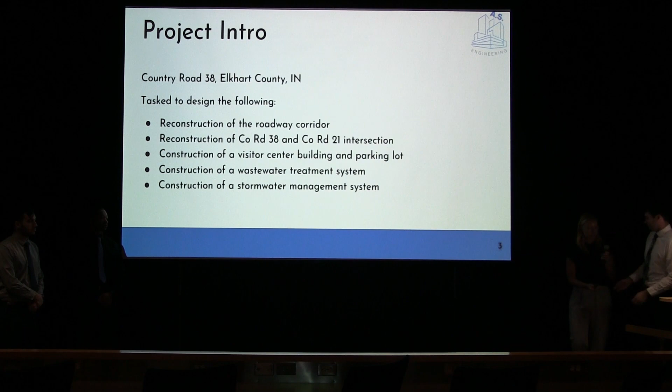Thank you, Henry. As Henry stated, my name is Carly Sheen. I'm the transportation engineer for 4S Engineering, and I'll be going over the transportation portion of this project.

For the scope of the project, one of our main goals is to improve safety for all road users, including pedestrians, cyclists, and drivers, through the implementation of the proper infrastructure for the resources that we have. Another goal is to upgrade the level of service and stimulate economic development through the movement of goods and workers through this corridor.

In this visual, you can see that some of my main goals are to analyze and design a new intersection for County Road 38 and County Road 21, design a new parking lot for the visitor center that will be constructed,

realign County Road 38 with a 3-lane section, and include a multi-use path along the length of County Road 38.

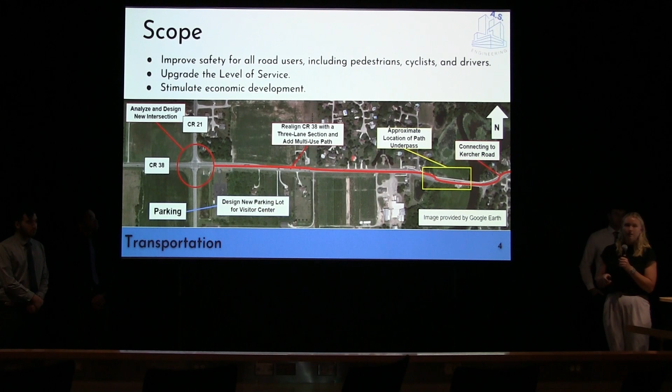We also will have a path underpass located on the east side of the project that will go underneath County Road 38 and tie into an existing path on the north side of the project.

For gathering data, since this project is in Elkhart County, a lot of the data was provided by Elkhart County since we're under their jurisdiction. So the traffic counts and the crash data were both provided by them, and we're designing to the design speed of 45 miles per hour per the scope provided.

For determining the design criteria, I designed them to Elkhart County street standards, a policy on geometric design of highways and streets, also known as the AASHTO Green Book. I designed to the Indiana Design Manual 53-2, and since this project is funded by Elkhart County, we're designing to

their standards, which, unless otherwise stated, is the AASHTO Green Book. So most of the stuff that I was grabbing from was the AASHTO Green Book.

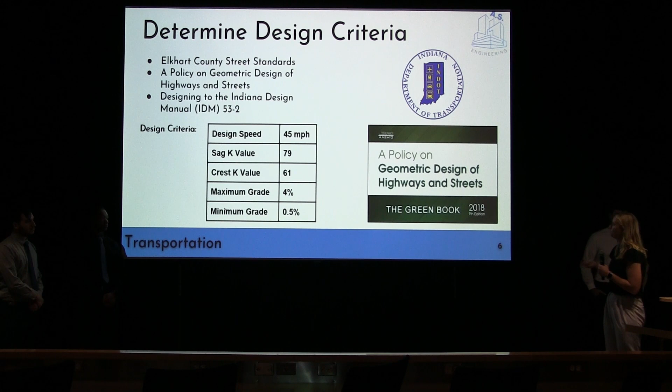For analyzing the data, I conducted a traffic impact study due to the new visitor center that will be constructed, and I used the ITE trip generation manual to grab those numbers using land use code 495.

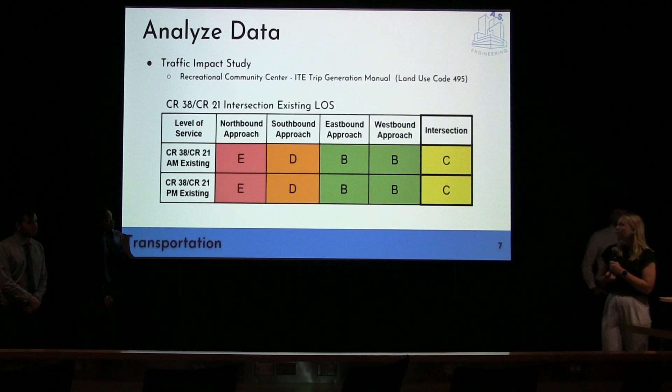Because of that, I was also able to use the traffic impact study to see what the future volumes will be on the roadway and figure out which alternative will be best, thinking about the visitor center that will be there.

Per the traffic counts that Elkhart County provided, I was also able to evaluate the existing level of service on the intersection, and the intersection as a whole has a level of service of C, which is good to see that it needs to be redesigned to upgrade that level of service.

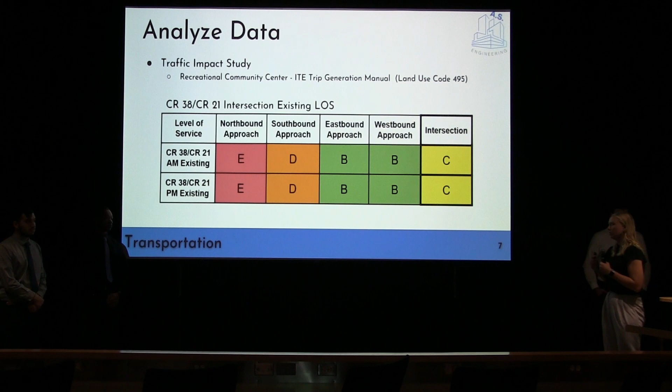Along with analyzing the data, I also designed a parking lot. Using the ITE trip generation manual again, and using the fit curve equation, it was recommended 101 stalls, but I rounded up to 122 to be conservative, and it fit better with the allotted area.

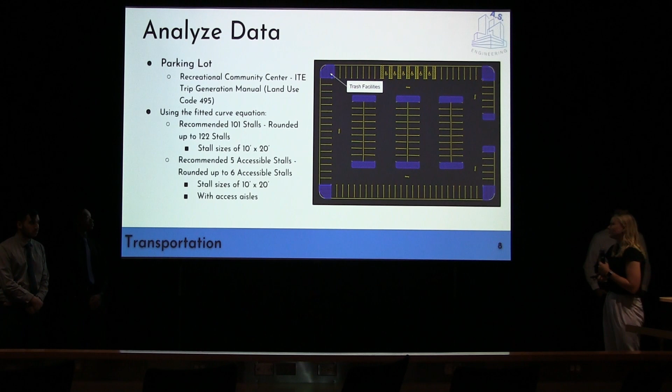I opted for stall sizes of 10 feet by 20 feet for bigger parking facilities, and for ADA requirements, it was recommended 5 stalls, and I rounded up to 6 accessible stalls, just for an even number. I also went with the same stall sizes, and they all have access aisles.

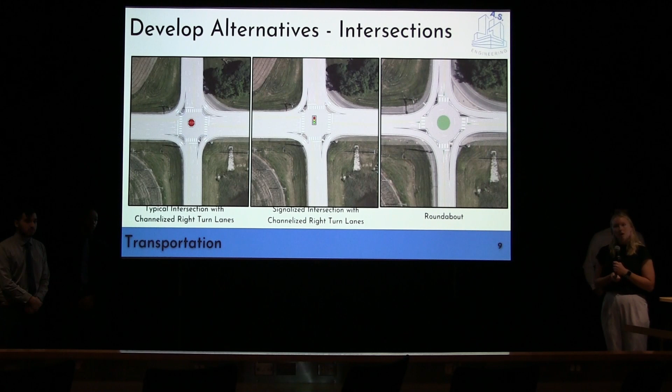For my alternatives, I opted for 3 different intersection alternatives. The first one being a typical intersection with channelized right turn lanes, the second one being a signalized intersection with channelized right turn lanes, and the third being a roundabout with 2 circulatory lanes.

For my next steps, I have to evaluate and select my best alternative by comparing all my alternatives in Vistro and deciding which one is best given my options. I also need to finish more detailed design work and model my chosen intersection in Vissim to have a 3D view for my next presentation, and I need to conduct a cost analysis.

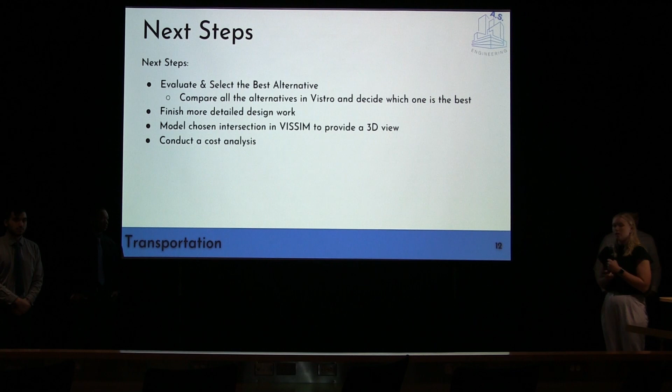I'll now be passing it on to our structural engineer, Darius Lane.

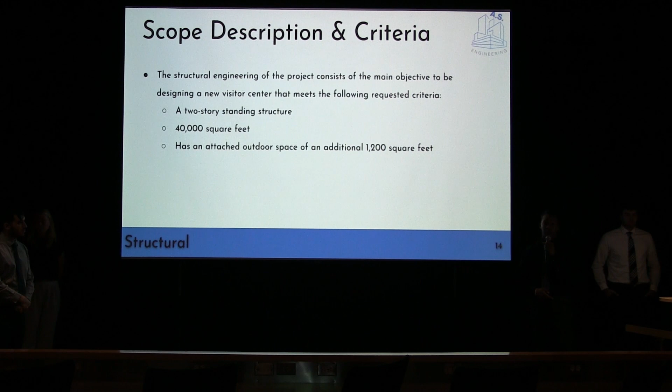I had to develop the scope and design criteria for the visitor center, develop 3 alternatives, analyze and evaluate the alternatives, and then select the best one. The scope is to build a 40,000 square foot visitor center that is 2 stories with an additional 1,200 square feet that is covered and attached to the building.

My overall progress: I have developed 3 design building alternatives - one is a steel hexagon alternative, and 2 are L-shaped, one being concrete, and the other a combination of masonry and timber. I have a rough floor plan for the design alternatives, but a detailed one is out of scope - I just needed an overall rough plan for column spacings and overall occupancy flows.

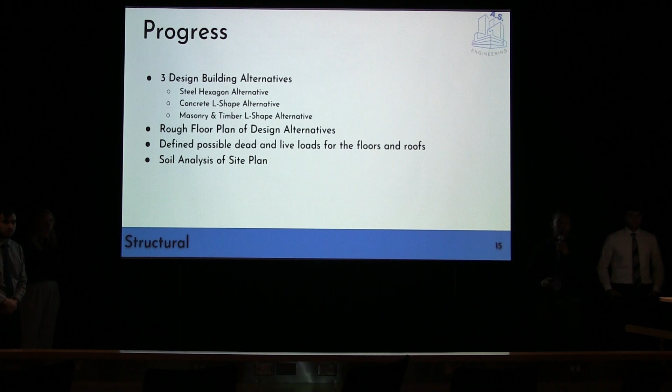I have defined possible dead loads and live loads, completed for the roof and the floor, and I have a soil analysis of the site plan.

For the first alternative, it's a steel hexagon shape, a basic steel structure with a lot of energy efficiency and flexible use, with less heat loss, which is good especially for this area as it has harsh winters. I predicted a pitched roof but haven't gotten into the details yet. These are the occupancy loads and floors I'm looking to use.

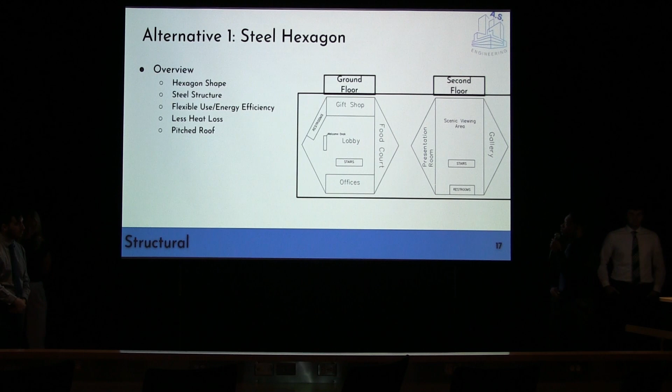Getting to my L shape for both the concrete and masonry timber combination: for the concrete overview, these are just basic physical properties I've been looking at, but nothing based on loads or column spacing yet. The concrete is a little more fire resistant, with high strength, durability, and low maintenance over time, so that's good to look at.

For the masonry and timber combination overview, it is more resistant against rotting over time, and it's fast construction and schedule-friendly, so based on our time frame, if we need to speed things up it'd be nice to use this combination. It also has increased functionality and overall energy efficiency.

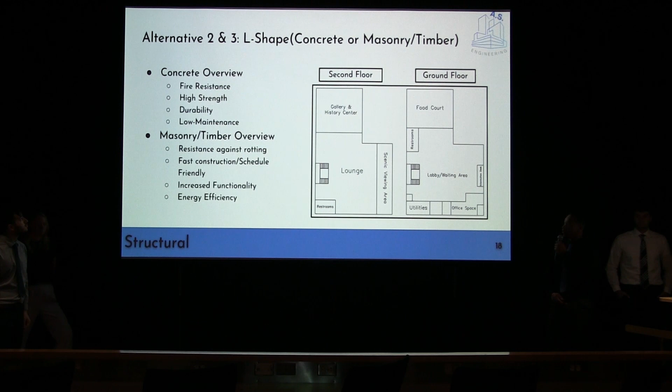Getting into my next steps, I would choose the best alternative based on cost efficiency, strength, durability, and overall functionality of the buildings. I would have to come up with a cost estimate for all of them and get into more details of the masonry and timber design elements to see if that's the route I want to continue or eliminate the alternative overall.

I will determine the column spacings, depending on if I need to change the occupancy loads I've already determined or stick with them, and then come up with an overall site layout construction, which would take place later, either by the end of the semester or the beginning of the next one.

And I'll now pass it on to our environmental engineer.

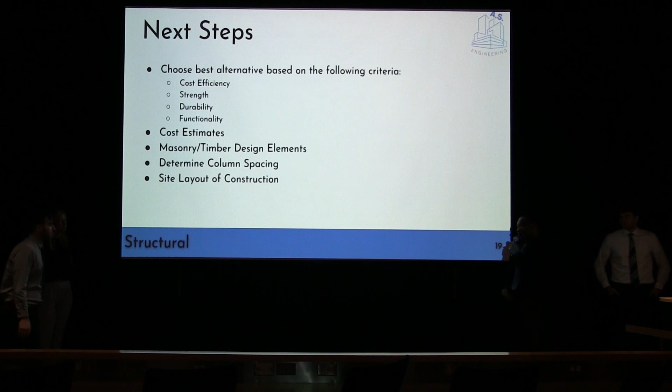Thank you, Darius. I am Jessica Messina, the environmental engineer for 4S Engineering.

My scope for this semester was to make a wastewater treatment plant that accommodates future work, future use, as well as expansion. Within this treatment plant, there must be primary, secondary, as well as tertiary treatment and disinfection. This treatment system must have a disposal outfall, as well as 1 million gallons per day average daily flow rate. With this, the system must use latest treatment technologies, as well as comply with all local, state, and federal regulations.

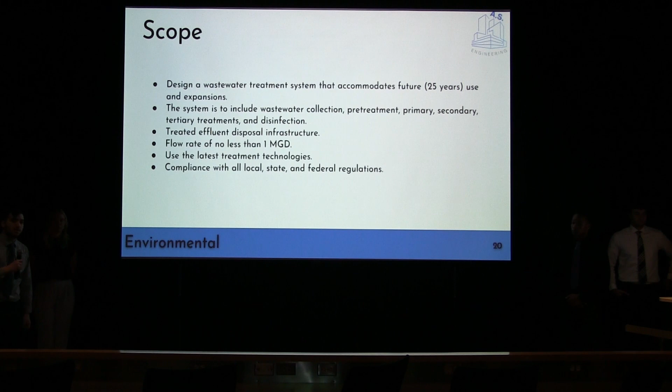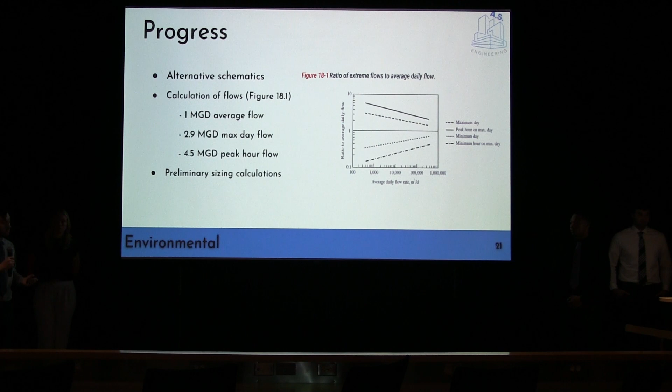My progress for this semester has been making 3 alternative schematics. Within these schematics, I have found 3 flow rates to be useful using figure 18-1 in the wastewater engineering book. These flow rates are 1 million gallons per day average flow, 2.9 million gallons per day max flow, as well as a 4.5 million gallons per day peak hour flow. Using these flows, I've made some preliminary sizing calculations for my alternatives.

My first alternative is a full-scale activated sludge wastewater treatment plant. This begins with the pre-treatment, which is a bar rack building, which contains 2 bar rack channels, a mechanical screen, as well as a fine screen. Although 1 bar rack channel can handle the full flow of the plant, the 2 must be needed for redundancy as well as making it easier for maintenance.

This then continues to the start of the primary treatment, which are the aerated grit tanks. These have a blower that blows air into the tank that separates the water from the fine particles such as grit and sand. This then goes to the end of the primary, which is the primary clarifiers, which have the oil floatables float up to the top, which are skimmed using an arm skimmer, as well as the total suspended solids settled to the bottom.

Finally, we move on to the tertiary treatment, which I've identified as either a disc or a drum filter that will filter out the rest of the suspended solids left in the water. Water will then continue into 2 UV channels, which use UV lights to disable viruses and bacteria. Like the bar racks, there are 2 channels, but only one can be used for the system, just for redundancy and maintenance. Finally, there's an outfall that disposes the water back into the river.

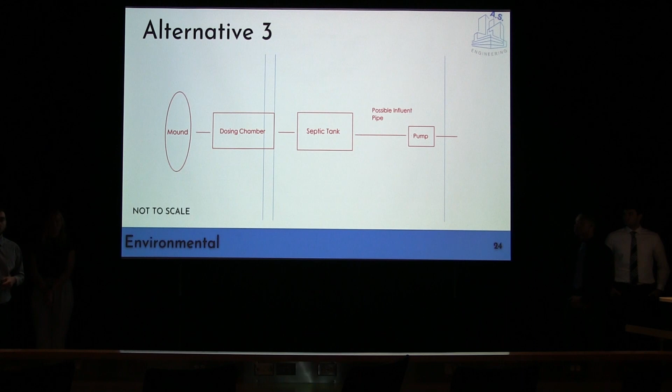My third alternative, I would have an on-site mound system, which would be located west of the visitor center. This would include a pump, which pumps it into a septic tank. Before the septic tank, there would be a fine screen to trap any of the bigger solids. Within the septic tank, we would have the total suspended solids settle to the bottom. This would then continue onto the dosing tank, which would have a dosage of chlorine before going into the mound for the water to settle into the soil.

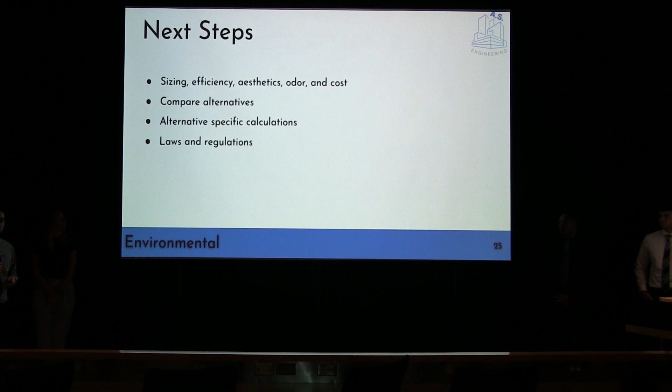For my next steps, I will make a design criteria matrix, which compares the sizing, efficiency, odor, aesthetics, as well as cost of all alternatives. Using this, along with a weighted factor for each one, I will determine which alternative is the best. From this, I'll make alternative specific calculations, as well as making sure to comply with all local, state, and federal regulations. With that, I'll pass on to Henry Carter, who's our water resource engineer.

Thank you, Francesco. I'm Henry Carter, our team's water resources engineer.

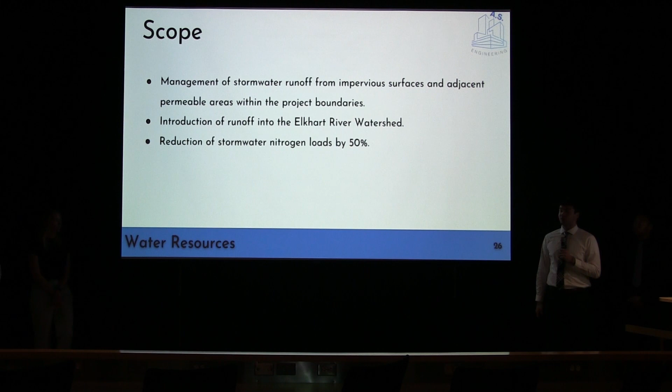For the scope of water resources on this project, I am tasked with designing a stormwater management system that will manage the runoff from all pervious and impervious surfaces throughout the project area. This water will then be introduced into the Elkhart River watershed, and before I do that, I'll need to reduce the stormwater nitrogen loads by 50% site-wide.

I have also designed some alternatives, which we'll discuss momentarily. A flood control volume is basically a large amount of water that comes from larger rainstorms you don't see every day, such as a 100-year storm. The goal of treating a flood control volume is to basically reduce flooding in the area and get it out of the system into the river as fast as possible.

For a water quality volume, that comes from your typical design storm that you'll see every day, and that is the water that will be treated for nitrogen reduction.

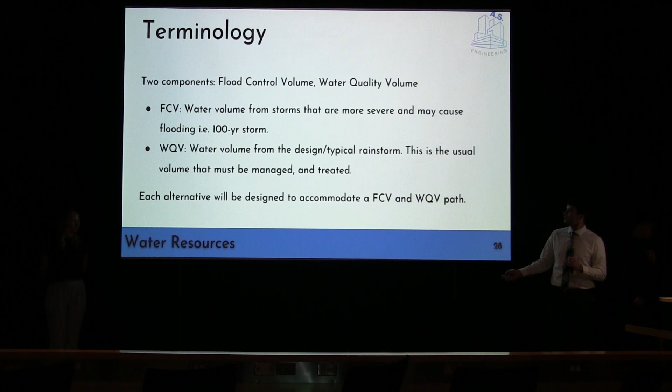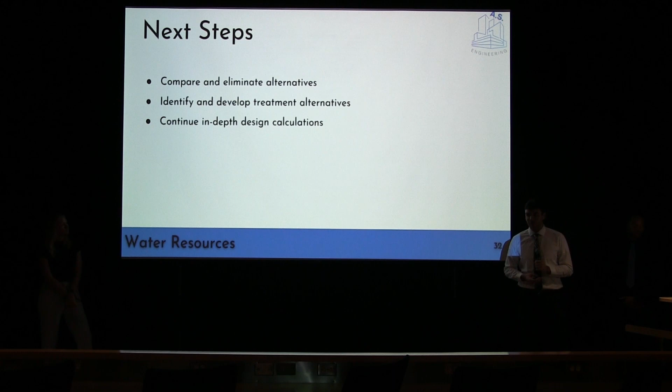Thank you. Do we have any questions at this time?

Could you go to your first slide? The only difference between the blue and the green here is they're two different watersheds, so the design point's in the middle. That's just for calculation purposes using QGIS. Okay, thanks. So could you go to your first alternative?

So the infiltration basin is basically like the middle bottom part of the detention basin? Yes. Do you know what the soils are there, as far as the infiltration rates that will be possible? I don't know of specific soil composition, but it seems like sandy loam is the ideal soil here because it's the tangent point to having increased infiltration rates, but also increased nitrogen rates. So right now, that's what I'm working with, but depending on the soil layer, a mulch layer can also help on top of that. So increased infiltration, but what would you say about nitrogen? It will increase, or that is the greatest combination of efficient infiltration and efficient nitrogen removal.

Is sandy loam how you get the nitrogen removal? So the sandy loam, what that does, doesn't remove the nitrogen. It helps the plants and microorganisms - there's bugs and stuff that like the plants that grow well in that type of soil. So the soil itself is not actually removing the nitrogen. It just sustains vegetation better in a wet environment than other soils. You have to be careful because vegetation dies eventually, annually, and then decomposes and releases nitrogen. So in the long run, it might not be doing much.

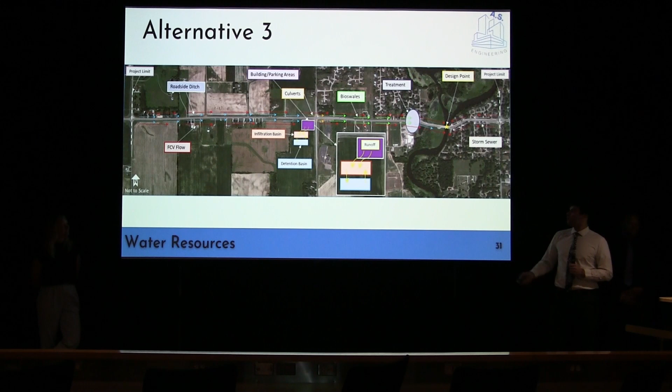Is there pre-treatment for the infiltration basin, or will there be? The pre-treatment will be through here. I'll go back to this real quick. In this yellow area, that is not all building and parking lot. The building and parking lot is up here. So going down through that grassy area will be the pre-treatment.

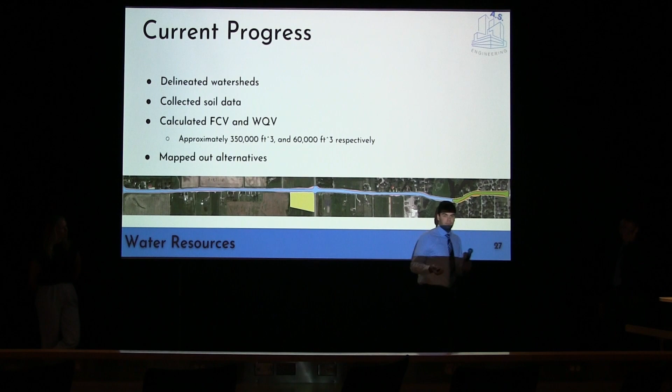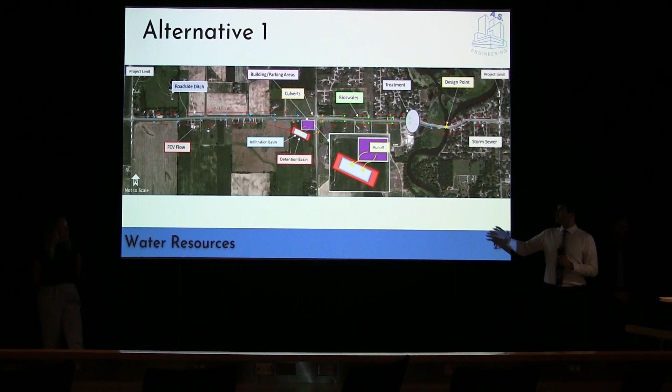So that purple on alternative 1 is not the building? That is the building area, I'm treating that as the building area watershed. For my pervious and impervious area, I'm treating that as a percentage here, because so far in the design, I don't have the exact footprint of all the pervious areas. Okay, thanks, I'm done.

Professor Reich: This question could apply to almost all of you. I'm interested in knowing what the county or the city owns as far as land, and then what elements of what you're proposing might require building on land that isn't owned—like Carly's drop-down roadway, the building itself, some of the basins or the treatment plant. So it covers everyone.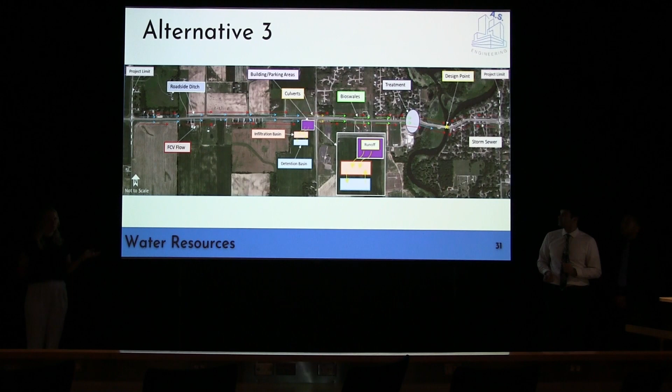For the building and the parking lot, we tried to pick an area where there was nothing, just an empty field. I'm not sure who necessarily owns it—it might be someone. Then for the wastewater treatment plant, I believe it's on a farm.

I put it there to begin with because I can see the contours there and want to see how it will flow gravity-wise, but the location isn't final—I could always move it south into the field. If I went with the alternative that drops the road down a little, it would be fine to build it on the farm, because then my roadway would go into the farm area anyway.

Any concerns with your elements? Yeah, this is what we discussed when we came down to picking a location—we wanted to stay close to the intersection, so we had to look into ownership.

That was actually something we discussed—it looks like we'd have to probably purchase some land since they're farming there. I feel most comfortable with this location because there's already another attraction there, so I feel it would help with overall quality of life, keeping more things central where something already exists rather than spreading everything out too much.

From my side of things, I have relatively the lowest footprint out of all of them. I designed the building area here as one watershed, so if we have to purchase this land, we can do it all at once. For my watershed designs, I'm trying to keep all the components within 15 to 20 feet of the roadway, so if we have to purchase extra right of way during construction, we can purchase a little additional all at once and keep it confined to that.

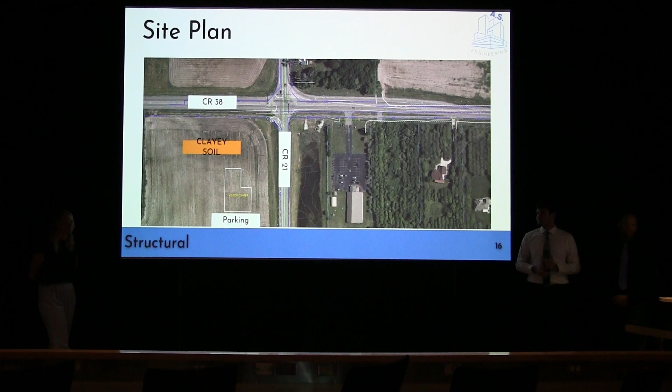That realigns the road. The message I heard from you was to move it away from the residential area on the north—that was one of the reasons. Why then would the multi-use path be on the south side of that instead of the north side, where it would be more accessible to those? That might be a better question.

It had to do a bit with our water resources ideas, and the fact that we were going to have to go under the road anyway per the scope provided. I figured I'd keep it on the south side of the roadway since we're tying into the existing path on the north side, but we have to go under and create a path underpass. In general, the multi-use path will be a better option than what they already have, because the existing crossing for the roadway has nothing on the intersection, so they have to cross 45 miles per hour of traffic.

But it's always something I could look into—I just figured I'd keep it the same way, since we have to have the path underpass, and with Henry's ideas for water resources.

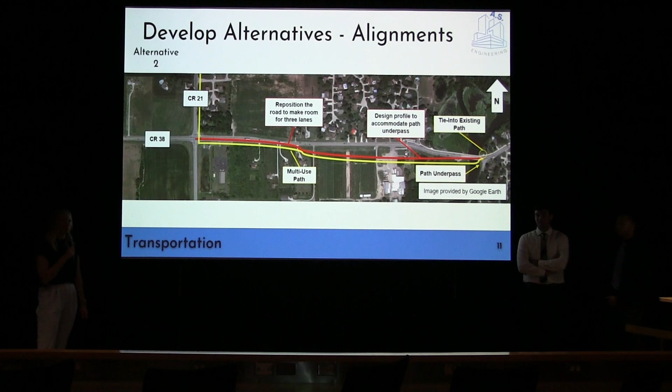I requested that the path be on the south side of the roadway because the watershed flows this direction, and my goal is to put the ditch or bioswales between the path and the roadway. If it's on the north side of the road, then I have to figure out how to get the water across that raised path area, so it makes my design easier. Well, I appreciate the coordination.

The path underpass, who's designing that? I have to design the profile and elevation for it, but it's my understanding that I don't have to do anything structure-wise with it. I know some of the options are either to lengthen the bridge to make sure it's wide enough, or to add a structure under the westbound approach per the scope we were provided. I'm sure that Rice and Schickel Incorporated would be happy to design that for you. Thank you very much.

I have a question for Francesco. When you were laying out your treatment train, I noticed you used ultraviolet disinfection. I know the standard is often chlorine treatment because of its cost here in the United States. What made you choose UV treatment? I chose UV because the scope asks for waste treatment technologies, and I have concerns about chlorine disinfection byproducts, which can be trihalomethanes as well as haloacetic acids, which can be possibly carcinogenic and have non-carcinogenic effects on humans.

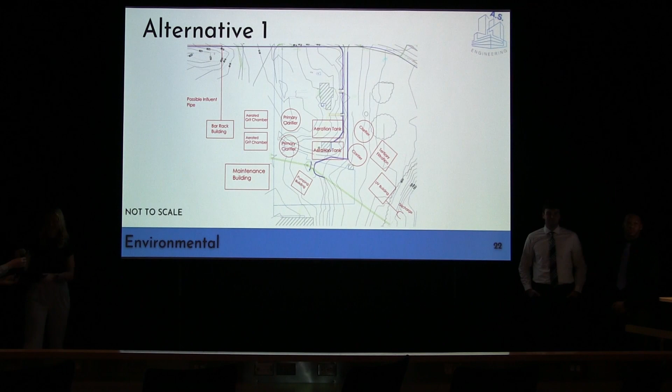I've got just one more question because it'll bug me all day. On the drop-down road, are you proposing, so you have the drop-down section, are you keeping the upper section still? Is it kind of like two parallel roadways, or would it all just be the lower roadway? Like this section, am I keeping it, going past the residential, that upper part where the driveways are? Right here? Yeah, when I extend, I guess you're saying? Yeah, so are you keeping that part and then just routing the main traffic?

Yeah, so it probably wouldn't be this extreme of a drop, but since I have to add three lanes and I'm not exactly sure what the profile is going to look like, I wanted to make sure I had an alternative that took the homes into effect, because I would rather drop it down this way where there's a field and less homes rather than raise it up where there's a lot of homes. So I would drop down the driveways and reconnect them to the road, making sure everything functioned appropriately. This alternative is aiming to make space for the widening of the roadway and the multi-use path.

I would say maybe look at the options if you can, because I'm not sure how easy it is to drop down someone's driveway, since that means going over someone else's land, perhaps. It could be worked out legally, but there's nothing to say you couldn't have some road still providing local access, like an access road rather than a main road. That's a good point, yeah. Something to think about for sure.